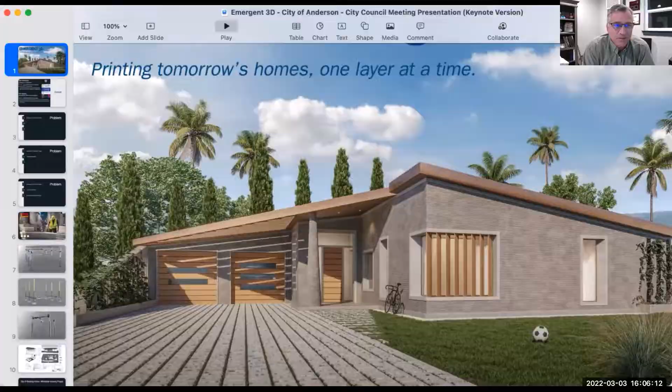Thanks for the idea. So again, my name is Don Ajamian, pleasure being here. As Christina said, I've been a licensed contractor for about 32 years and a resident here in Northern California for about that same amount of time. I've built lots of houses, affordable housing, commercial buildings, and multifamily structures.

I really ran a company that did work from Central California to Central Oregon. At one point, around 2001, I was running about 120 employees spread out all over the two states. And those of you in smaller towns will appreciate this: when you're in a town long enough, you get to know people in a lot of different ways, like the soccer parents as I'm sitting on the sideline, and they happen to be a building official or somebody in local politics or something.

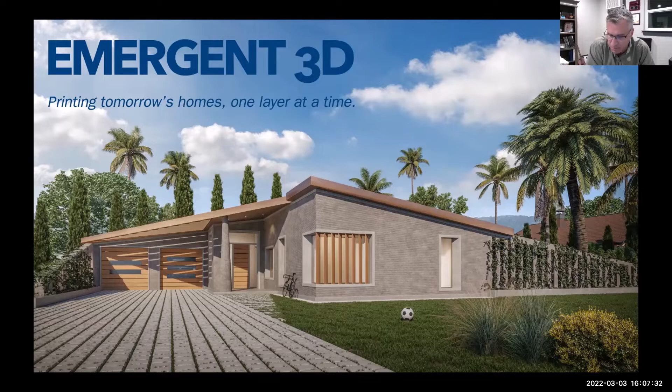That's kind of how it went for me. We had our Carr Fire up here a few years ago, and because I've been around so long, I've gotten to know so many people. After FEMA came in, they met with our community leadership and dropped off a notebook about 2 inches thick saying, this is how communities like yours recover after such a devastating disaster.

And so the Shasta County long-term recovery team was born, and I was asked to head up the construction subcommittee because FEMA had identified close to 300 families who lost their homes, were completely uninsured or severely underinsured, and would have no way of rebuilding without help. That was the challenge of my subcommittee. And that's where I met Matt.

He was hired through a local nonprofit, NVCSS, and ran the case management side of it. Between Matt doing that and me doing my thing, and all the other subcommittees, we met weekly for a couple of years addressing these issues. Needless to say, we got to know each other very well. Among many other things, we both have 4 boys, so we had lots of stories to share about that.

But beyond that, he was telling me about this idea of 3D printing technology. I was familiar with it just in that I'd seen the little desktop 3D printers, done projects for architects who'd 3D print an elaborate house model. But this was something much bigger, actually using cement to build homes with. I was quite skeptical at first, but hugely intrigued because it was addressing all the pain points I was dealing with at the time, and those have only gotten worse in the last few years, probably the last decade.

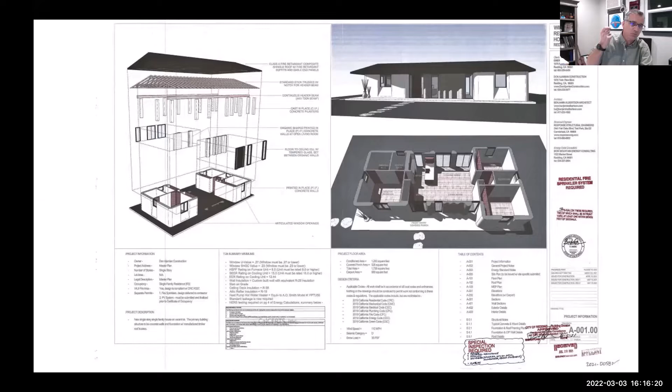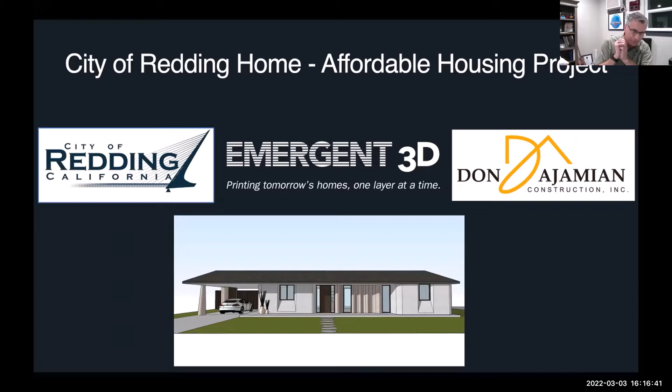That was used to then connect with the City of Redding Housing Division, and we've signed a contract with them to build 24 homes for various purposes in the City of Redding. Our main focus is disaster recovery, homelessness and homelessness transitional housing, and affordable/workforce housing. So that's what our program with the City of Redding is focusing on.

The first 2, we're printing this exact house in a couple of different city parks, and these are going to be park host houses, somebody to lock the gate at night and unlock it in the morning and make sure the riffraff isn't making trouble overnight.

The next project we'll do is for a 501c3 in town here, and it will be used for an at-risk population. Without getting into too much detail, it'll be used for this at-risk population, so it's going to be some housing for them.

The third one I'm really most excited about, because the city is partnering with us in a big way, and our commitment to them is we will provide all of these homes at our cost for their use. The third project, I'm most excited about, we get to design and build a group of homes for individual sale, and it is a challenge to see how inexpensively we can put those on the market for. So we're thrilled.

The challenge has gone out to our design team, to us as builders, to come up with something that is not only gorgeous, but is very reasonably priced as well.

So we've ordered our printer. Our first printer shows up here, shipping delays aside, probably around mid-April, at which time I think by end of April, beginning of May, we'll start printing this very home that you see on the screen here, right up in the City of Redding.

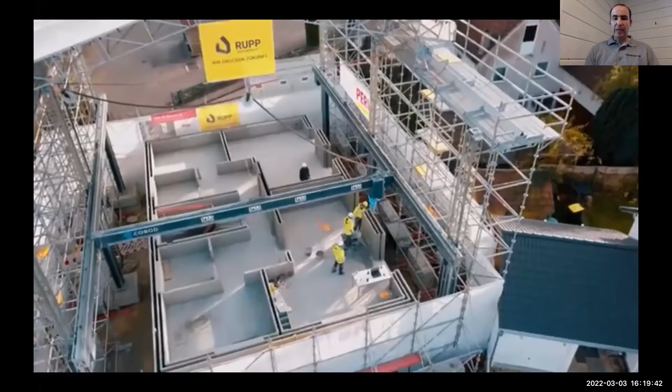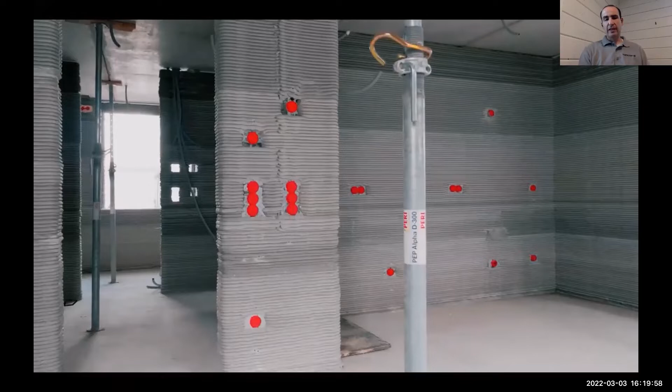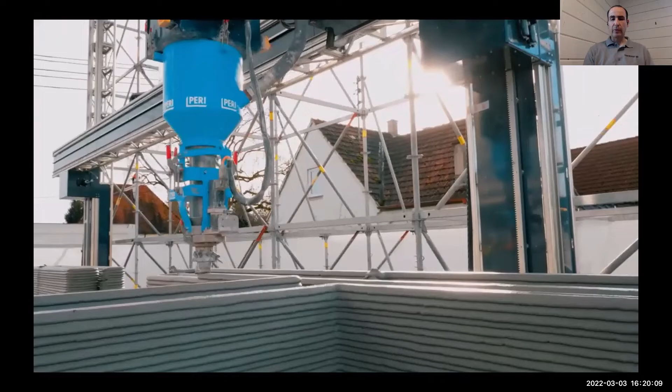I'd like to underscore, for those familiar with Mighty Buildings or other great companies in our state doing factory-built 3D printed houses, ours is all on site. So the printer itself is larger than the home or commercial building that we'll be printing. As you can see, it just layers the walls up layer by layer, and we're printing in conventional concrete.

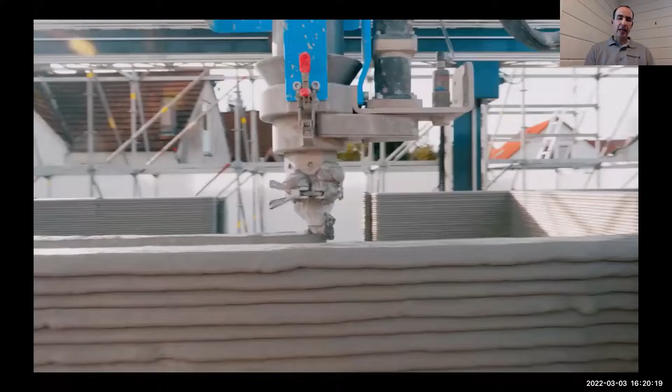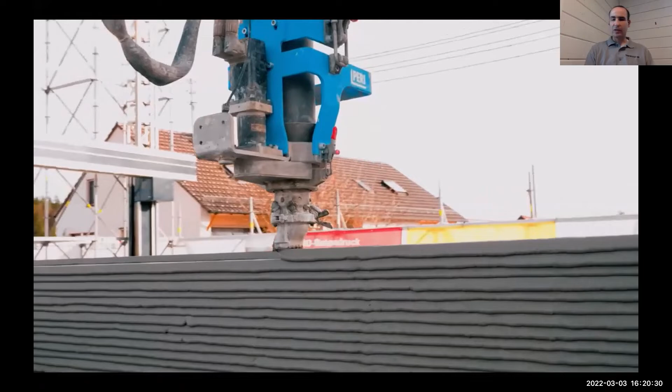We're receiving the next generation printer from the top 3D printer manufacturer in the world, COBOD. It used to require an expensive high performance mortar proprietary mix. In partnership with Cemex, one of the largest cement companies in the world, they came up with what they're calling their magic sauce, their secret sauce, to put additives into conventional concrete, and they're seeing about a 90% reduction in material costs as a result.

So we're very excited to be receiving that, and I think we'll be the second in the USA to receive that type of printer.

Some of the solutions 3D printing brings: once we have our efficiencies down, we anticipate reducing the total cost of construction by 35 to 40%.

So where is that savings coming from? We won't need to clad the walls with stucco or siding on the outside or drywall on the inside. We can do that, but obviously that drives the cost back up.

What's coming out of the printing nozzle is the finished product, and we're going to be playing with different options, like a patch and stack finish where it's nice and smooth, using readily available materials like sand, gravel, water, and bags of cement that you can find at any Home Depot. The ability to put additives in to make any locally sourced concrete and cement 3D printable was a game changer, and we're excited to introduce it to the California market.

A lot of people are saying, oh no, the robots are coming, you're going to steal everybody's jobs and automate and put people out of business.

Actually, no. As Don mentioned, we have a generational gap. Certainly my generation and the millennials are just not coming into the trades. The baby boomer generation is the largest cohort of tradesmen and women, and the front half of their wave has come through since 2013 and have been retiring. The last half of the wave is going to retire out by 2030, taking their expertise and wealth of experience with them.

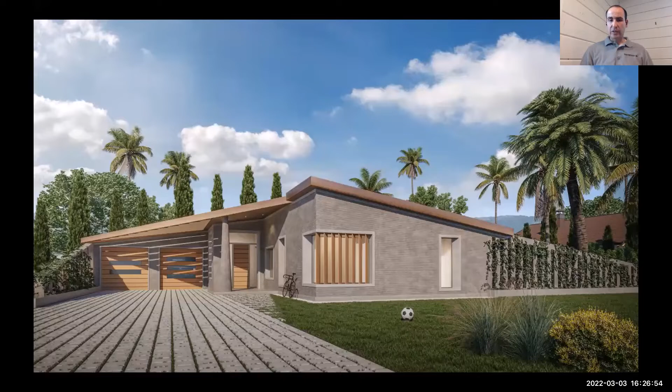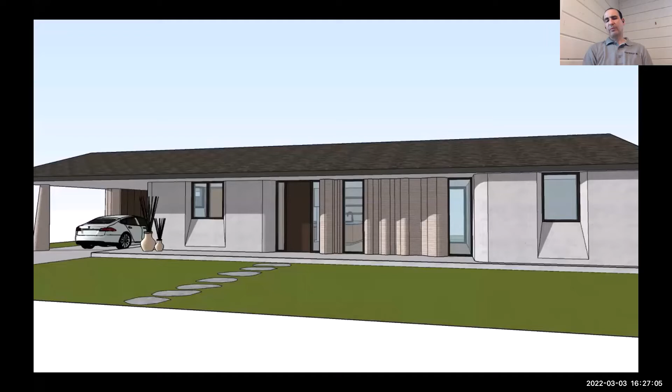Here's an example of what an affordable 3D printed house can look like in our communities. As you can see, they're anything but concrete bunkers. They're actually aesthetically pleasing. And here's another example of what an affordable 3D printed house could look like. I'd like to point out they're fire resistant because they're concrete. So here in fire country, having at least a little bit of peace of mind that you're going to have a more resilient home against wildfire is important.

It's also 29% more efficient than the 2020 code requires. Because we have an air gap rather than thermal bridging with studs, and high performance insulation, our model shows, according to our energy engineer, that it calced out at 29% more efficient than the code requires. That will be very helpful for families who need to save on their energy bill.

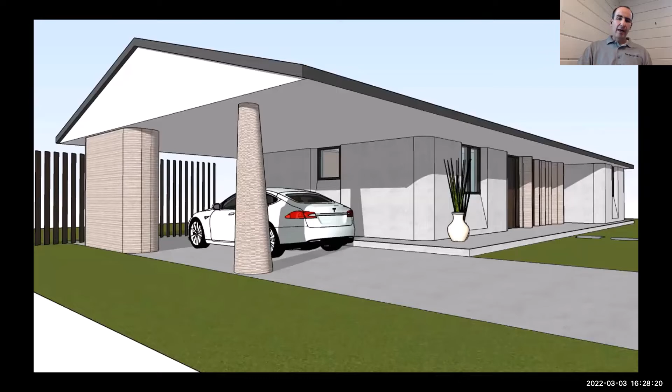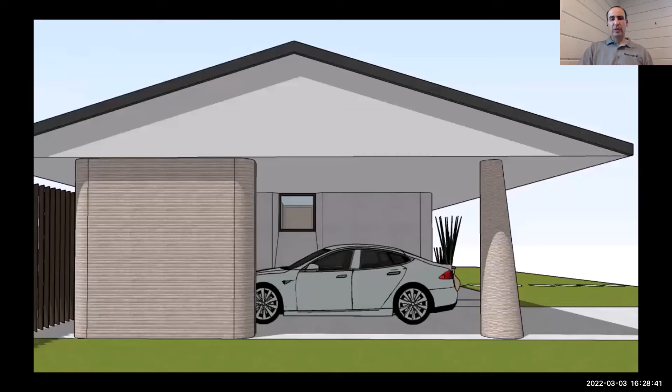Some unique design features I'd like to point out: notice the wavy wall by the front door, what we're calling our organic wall. Here's a better look at it on an angle. That would be totally cost prohibitive or nearly impossible to do with traditional methods of construction, but with 3D printing it's as easy as hitting the spacebar button and it will do it. Also this cone-shaped pillar, again, would be very difficult to build with conventional construction methods, but with the 3D printer it's no problem at all.

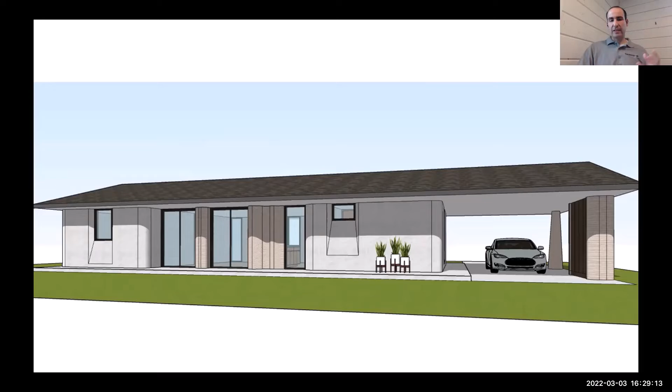Then these unique design features give more of a custom level finish: the beveled and recessed windows and curves, and the floor to ceiling windows and doors. We did that design in order to avoid having to print over the top of a door or window. We can do it, but with the cost savings we're realizing, we figured let's just go ahead and put that in. It makes it easier to 3D print, and it's a more desirable look. We went with an open floor plan for this 3-bedroom, 2-bath.

Some environmental benefits that come with 3D printing, with additive manufacturing, is that there will be less waste going into our county landfills. Why is that? When the 3D printer stops printing, the material stops. So we're going to have fewer offcuts of 2x4s and drywall and other materials going into the dumpster and then into our landfills. I thought this was a staggering statistic, that 75% of all the waste from construction, from wood, drywall, bricks, and clay tiles, ends up in our landfill. So I think we'll be able to reduce 3 of those 4 materials, which is also very good.

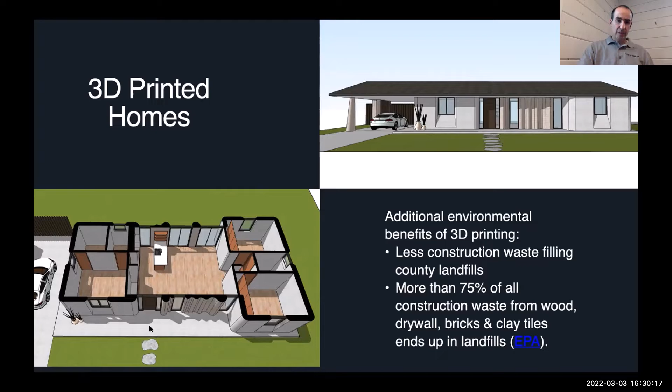We're also happy to announce that we're working on the first 3D printed church or commercial building in California, and the first 3D printed church in the world. If all goes well, we hope to have plans approved for this building by this summer and start on this project in the fall.

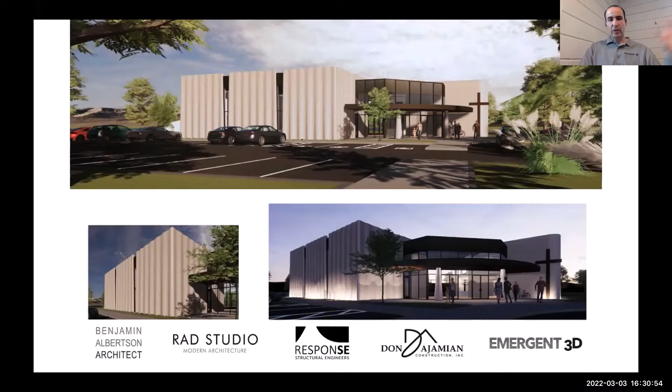Some design features I'd like to point out: you can notice again the wavy walls. The architect wanted to make something unique. On the inside, we're really excited about this. Our architects reached out to a top acoustical engineer, I think he designed the Kennedy Center in DC. If you'll notice the walls, how they look like curtains, starting a little thinner on top and then widening out, that is not only architecturally beautiful, but it is acoustically tuning the room. So the architecture has a practical application with the acoustics.

These are the type of features we can add in with 3D printing without significant cost increase. We're really excited to see what other architects can do, and I'm glad to have an architect on with us to start dreaming up all the types of use cases and unique designs.

We've been busy developing a partnership ecosystem. As you know, to get these large scale projects off the ground, it takes a village. We've partnered with the city of Redding, with government agencies that approved the projects. We had a 5-0 vote with the Redding City Council, we were really grateful for that, to approve the city of Redding project. They're also able to provide government funding through things like the American Rescue Plan, the Community Development Block Grants, and the Disaster Recovery Block Grant.

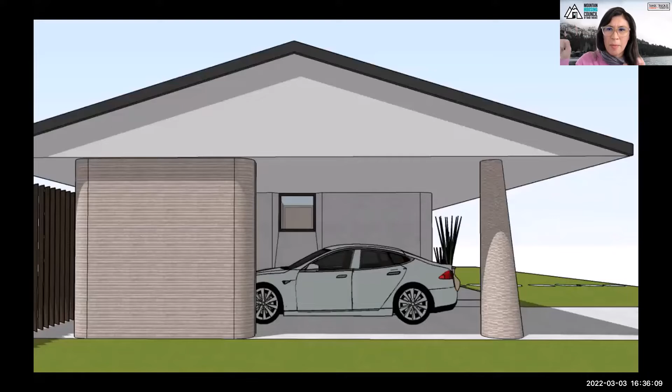I really appreciate that you guys are working with the long-term recovery group, and recognizing all of the kind of engagement that you've done at the local advocacy level, but also figuring out sometimes those gaps between real-time solutions and what's actually allowable costs from FEMA at the time of disaster. So would love to zoom in on that.

Thanks guys, yeah, absolutely. Well, thank you for your question. I hope - just let me know if I'm not addressing it - but since I served as the program manager for the disaster case management program here for the Carr Fire that was FEMA funded, the way that it went for folks here is if they were awarded a grant, then they could apply that to their homes.

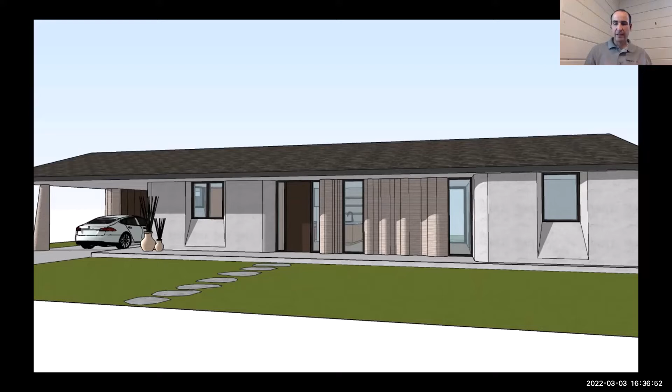And most of our clients, unfortunately, were so severely underinsured that even with the FEMA grants, they still weren't able to make up that gap. And so what our long-term recovery group ended up doing is through donations from very generous donors and through the nonprofits in the county and city grants, we were able to gap that funding. Unfortunately, right now with where prices are going, that gap has only grown. And so that is what we're hoping this technology will help to address - at least bridge that gap more.

Once we get to the 35 to 40% savings - right now we're not, until we get our efficiencies down - but moving forward, we're hoping to close that gap, and so make these homes affordable where wildfire recovery clients can afford it.

Thanks, guys. Beautiful stuff. Thank you. Yeah, we're excited to take a road trip to Redding to see your community. You're most welcome. Oh, thank you.

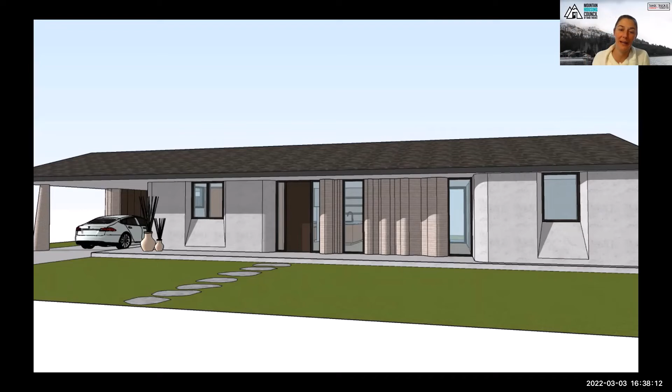I want to comment on the previous one first, to be clear that we're not looking at this as a replacement for manufactured homes. There are companies doing 3D printed homes as a manufactured home in a factory, and the challenge is you can only print something as wide as the highway lane to deliver it. Ours is an on-site solution. We set up the machine on the property, and this first machine we've ordered has up to a 3,000 square foot print area, so we can do much bigger and broader shapes. I appreciate the thought that it's maybe just trading one job for another, but it's more competing. Also, because we're doing it on site with in-ground foundations and all the rest, it qualifies for traditional financing as well.

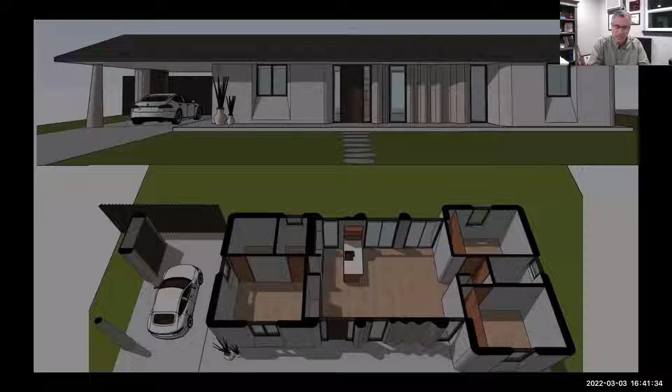So we created a design that works within the current laws on the books, through the current code. Our design utilizes post and beam construction. Within the exterior walls, in every wall we actually print two extrusions - think of it like printing the skin of the walls, the exterior skin and the interior skin, with a 10-inch gap between them. Within that gap, we also print intersecting lines to create a 10-inch by 10-inch column void. After printing, we drop a rebar cage into it, secure it to the foundation, and fill it with concrete. We do that about every 8 feet on center around the perimeter of the house, and that becomes our posts. It's a code-acceptable method, approved per the California Building Code. So the printed walls are just the skin, but the whole thing is supported by these steel-reinforced columns.

I'm going to jump ahead and piggyback on that with a couple of questions. One is Tara's question about strength and durability over time, speaking to the concrete. Philippa's question, and I apologize if I'm mispronouncing your name, is that concrete is a very unfriendly material, creating environmental concerns - what are you doing to mitigate this? And a third question: you mentioned that you qualify for financing like a traditional home, but when Matt and I spoke a couple of weeks ago, we touched on fire insurance coverage and how because these homes are resistant to fire and made of concrete, you're actually better off qualifying for that. Maybe you could touch on the insurance piece as well.

Well, Matt, maybe I'll take that - that was a mouthful. Yeah, no, that's good, I'll take the first one, and he's younger than me, he'll remember the next two. On the first one, you know, it's concrete - at the end of the day, this is concrete. There are lots of concrete structures that have lasted a whole lot longer than homes with siding on them and other more traditional methods. So we're not really reinventing the wheel, we're just reinventing how it's applied.

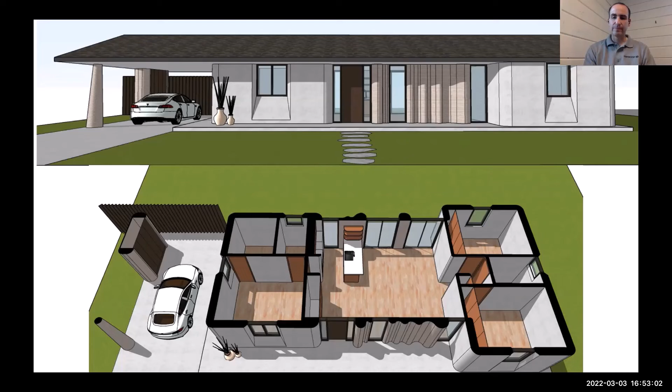We have about 7 more minutes, and there are a couple more questions in the chat. I also have a question: how does this scale to single homes, one-off homes, and not a community of homes? Is that possible and feasible at this time?

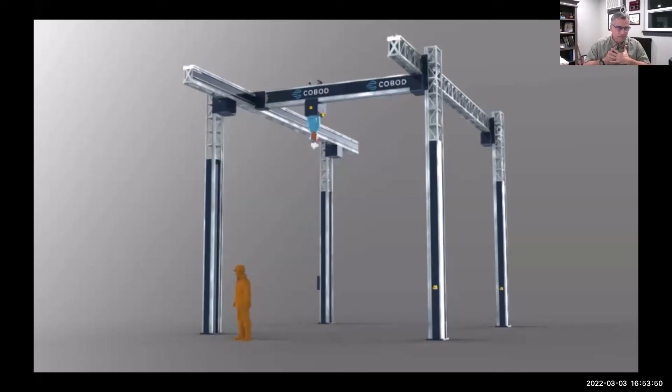It certainly is. In any case, we've got to set up our equipment and then take it down and move on. I'd say the biggest difference with a one-off is just the design expense—if it's a design already in our library, that one-off doesn't incur the design expense. Aside from that, for now we're looking for flat property. If it's a home that can be built with a slab on grade, it's for us. If it's on a slope, at least for now, it's probably not for this technology. But absolutely, as long as there's room to set up the equipment and we can get over the design side of things, we can do a one-off.

Thank you for bringing up those conditions. Yeah, it's very specific to our region.

Can you build multi-storied, multi-unit buildings? Yes—we actually just received a letter of intent for a 430 unit project. It's a 4-story apartment complex and townhouses.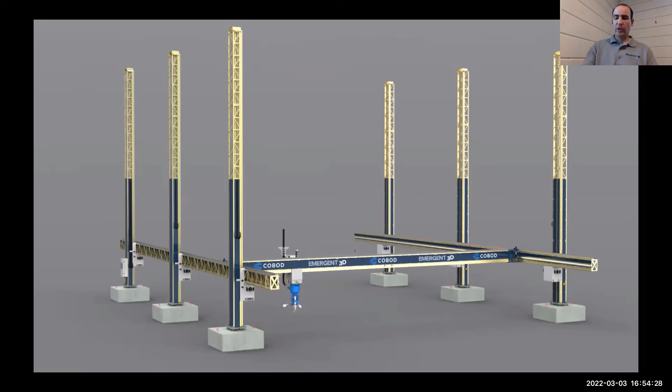With this larger printer, it can do a 3,000 square foot single story within its print area, or a 6,000 square foot footprint. They're also coming out with a next generation that will retrofit our model to be put on rails, which will be very cost effective and time efficient for multifamily and 2-story builds. We'd go up and down, set it, and then it would move along tracks. We absolutely want to serve the multifamily market.

Great, thank you. Another question related to earthquakes: is there X bracing in the walls? Post and beam doesn't address the sideways loads of earthquakes. And what about heavy snow loads, especially over the windows?

There is not X bracing. I'm not an engineer so I may not get it exactly right, but I think they call it a cantilevered column—a column that's tied into the foundation. It actually does address the shear because of the size of the column. So imagine a foundation with a column tied to it, and at the top of all these columns is a continuous beam that ties them together. Depending on the snow load, the location, the size of the footing, the column, and the beam can all be adjusted based on the load conditions in a certain geographic area. We're using conventional trusses, so those can be designed as necessary too.

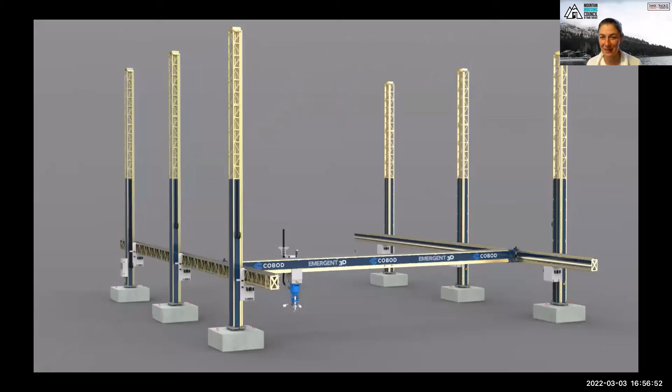Are there any particular concerns regarding electric, plumbing, etc., that are different from regular homes? That's a great question, actually.

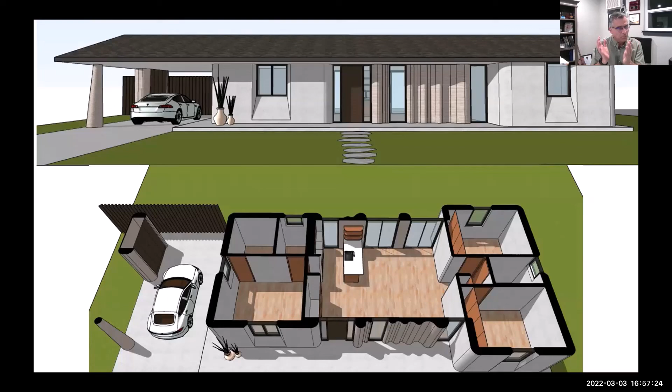Every wall we print, interior or exterior, is actually 2 courses with a gap in the middle. If it's a plumbing wall, we leave a bigger gap; if not, a smaller gap so we can run electrical through it. On the exterior, the gap is big enough for our structural columns plus the insulation that blows into the cavity. Every trade is affected a bit—we've had to retrain electricians, because they used to install their blue boxes as the printer came around. When we reach outlet height, it's almost like a cookie cutter shaped like the blue box—they cut out a bit of concrete, put the box in, and the next layer goes right over the top.

Plumbing is a little different, and hanging doors and windows is a little different too. So there is some retraining of our current crews, but from all indications, we've had really good buy-in from the subcontractors and suppliers.